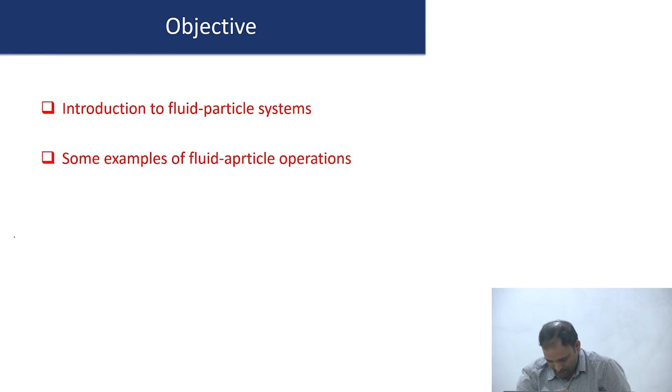Okay, just to begin with, particles are kind of everywhere, right? You look at any chemical industry or any industry in general, you will always have particles. Particles are dealt with in different forms, as listed here. You can either work with particles in the dry form. There's a lot of interest in looking at powders, processing of powders, how do you handle them, aspects of that sort. You also have cases where the particles are processed in a wet form, for example, paste, things like that.

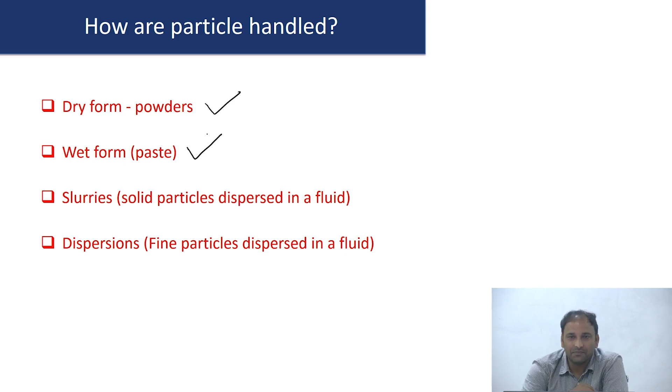And more often people work with the particles dispersed in a fluid. That's the last two things. You will come across something called slurries, which is basically a dispersion of solid particles in a fluid. Only thing is when the particle size is coarse, larger sized particles, maybe tens of microns or millimeter sized objects in a fluid, that's when you think about slurries. You also have something called dispersions, which typically refers to fine particles dispersed in the fluid.

More of buzzwords, if you want to call it, you can think about colloidal or nanoparticle dispersions. So what we're going to do in the rest of the 5 weeks is look at how people handle particles when you put them in a liquid. That's going to be the goal of the next few lectures.

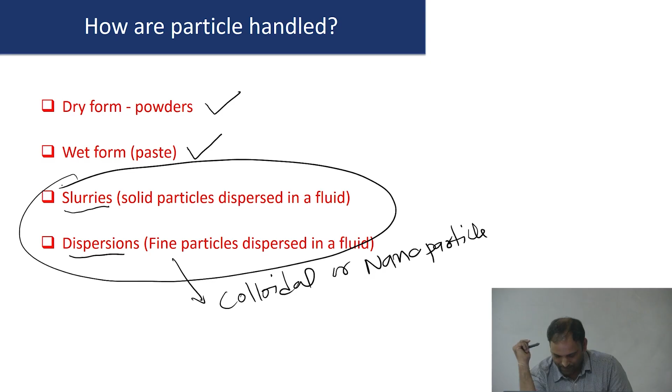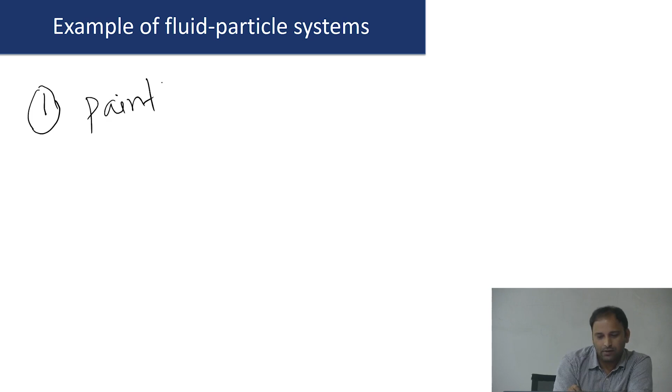Okay, any examples of fluid particle systems you know of? I just want to list different fluid particle systems that you know. Some names. I'm sure all of you know this. Let's write some examples, right? How about paint? Paint is typically some solid particles dispersed in a fluid. Of course, there will be other additives like pigments, but definitely there are some fillers, and these fillers are in the form of particles, and therefore paint is an example of a fluid particle system. Any other examples?

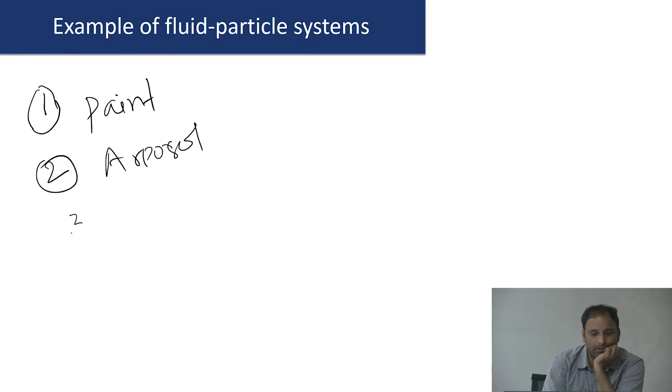What is that? Aerosol is a kind of fluid particle system, yes. How about milk? Milk essentially has a lot of water, plus there are some casein micelles, some proteins and stuff like that. That's an example of a fluid particle system. How about blood? You have RBCs, there is plasma, right? So I can think of a lot of examples where particles coexist along with the fluid.

What is common between paint, milk and blood? What is that? Okay, I don't know if you can really call blood a colloid, because the typical definition of colloids is that you should have a particle size ranging from 1 nanometer to about 1 micrometer. If the particles are in that range, they are called colloidal dispersions or nanoparticle dispersions. But blood's red blood cells are larger, about 8 microns, so it's really not a colloidal dispersion. But still, there's something common between paint, milk, and blood. What is that?

They're not emulsions. I mean, if you look at blood, it's not an emulsion. We'll come back to some of the classification a little later on. But what is common between the three is the dispersing medium: they're all particles in a fluid, right? And in this case, the fluid is a liquid. If you look at all these things, these are particulate dispersions in a liquid. That's a common thing between 1, 3, and 4, right?

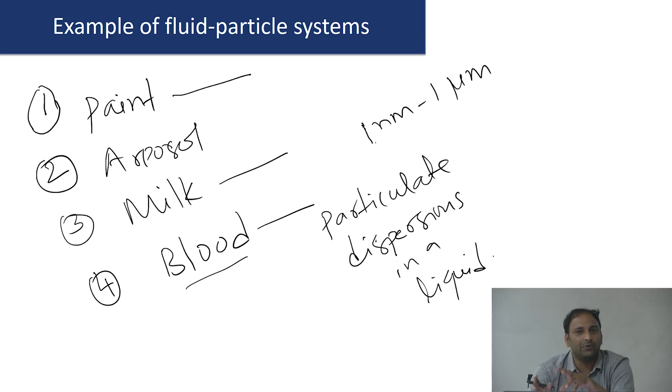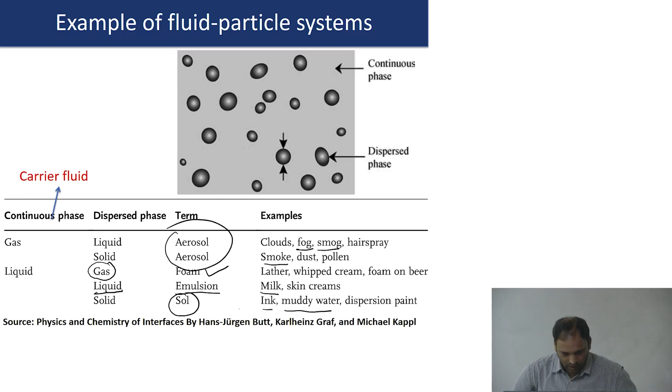Now that we know a little bit about fluid particle systems and different examples, I have a question to ask. Can you think of an example where the formation of particles occurs during a processing operation or unit operation? Any examples? I want an answer. So far, we looked at milk and paint and stuff like that. Of course, milk and blood are naturally occurring, so there are particles inherently in the fluid.

Paint is a formulation wherein you put particles into a fluid to get a paint of whatever desired quality. These are examples where the particles are either already there or dispersed externally. You take them from some source and put them into the fluid. I want an example: are there operations where the particles are formed during an operation? It could be any chemical process. Yeah.

Grinding. Okay, so he is using the term grinding. I hope all of you know grinding. You take a solid particle and reduce the size. There are different ways of reducing the size, but if you chop off particles and make smaller stuff, that's what is called grinding. That's an operation where you start with a larger particle and break it down into smaller particles. I want an example where I have a fluid, and the particles are formed during its processing.

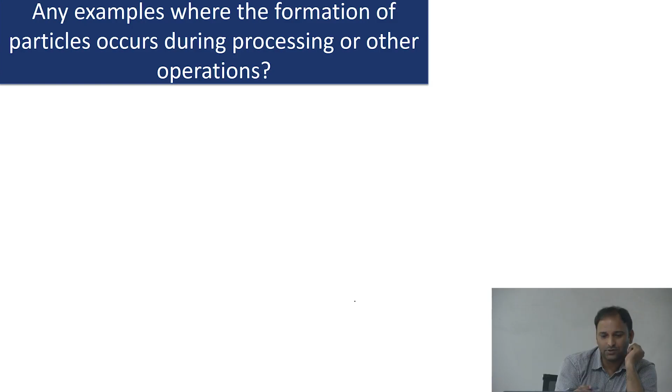Precipitation, right? Precipitation is one example. All of you have heard this word precipitation. This typically happens, in a loose term, when the fluid becomes insoluble for the particle. Say I have a solution, for example, water plus some particles, or some salt dissolved in a fluid, and I have a way of changing the solvent quality.

Let me take an example. Precipitation is one of the areas where there's a lot of research. I'm going to give an example where precipitation is used as a method for making particles.

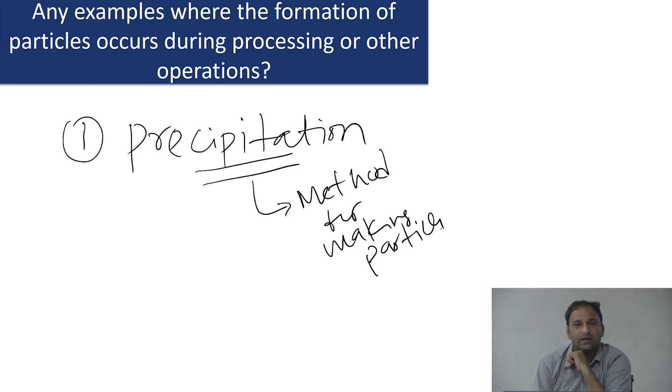Okay, there's a class of technique called nano precipitation. What is done is this: you take a container, and your container has water. And you take another solution where you have some solvent, and in the solvent you dissolve a polymer.

This solvent is a good solvent for the polymer. The polymer completely dissolves in the fluid, and it gives you a clear homogeneous polymer solution. Now, when I add this into water, if the solvent and water mix, they like each other, and if the polymer doesn't like to be in contact with water, as soon as I add this solution into water, the polymer separates out in the form of a particle.

This technique is what is called nano precipitation, again one of the widely used techniques for making drug particles and things like that. So one of the examples where particles can be formed during your operations could be nano precipitation. Any other example? Chemical reactions as well, right?

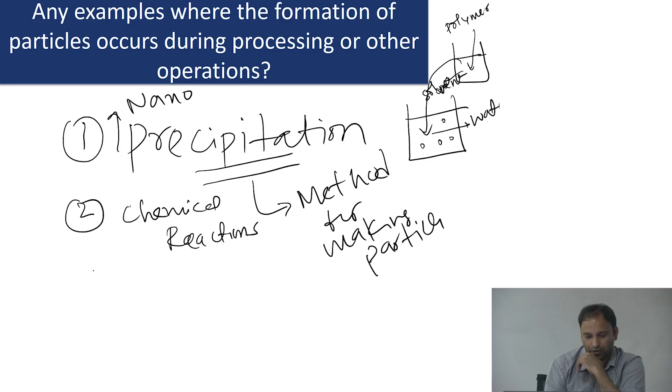So you can have chemical reactions. You can have a reactant A plus B giving rise to some product, and the formation of the product could happen during the reactions. Any other thing? Something that all of you know? Crystallization. Whenever there's a homogeneous fluid, if you create some sort of supersaturation, there's going to be nucleation of particles and stuff like that.

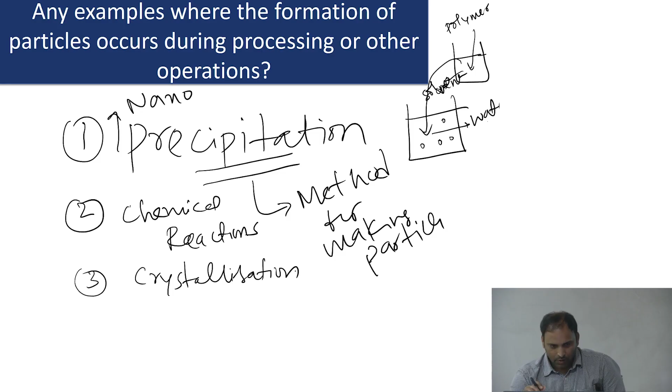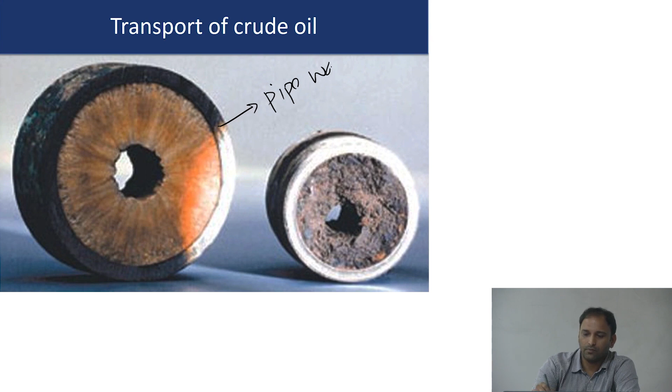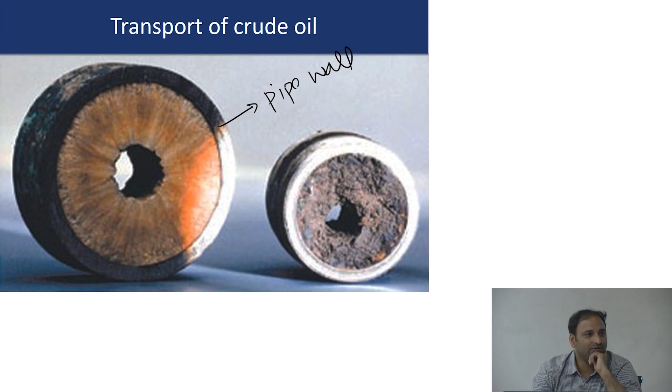So that's your pipe wall. This is your wall. What is in the center? Any guess? That's your wax deposition. All of you know that crude oil is a complex mixture. It has hydrocarbons, paraffins, aromatics, asphaltenes and things like that. There are organic compounds of different molecular weight present in the fluid.

When you're transporting these fluids, depending upon several conditions, the crude oil could be subject to different conditions. The temperature around the pipe could reduce during transport, depending on weather conditions, hot, cold and so on. Because you have long chain molecules of different molecular weight in the crude oil, when you cool such fluid there's going to be some sort of crystallization.

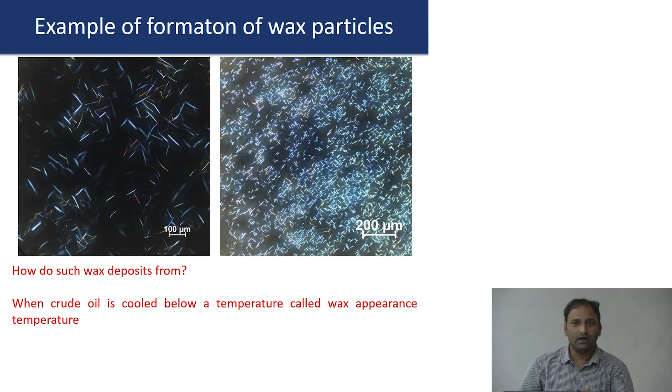What you are looking at are images obtained by taking an oil with some wax dissolved in it and heating the whole fluid to a high temperature, like 80 degrees centigrade. If we start cooling it down, at some point you see the formation of needle like structures. These are the wax crystals, formed when you cool the fluid down to something called the wax appearance temperature.

If you transport this crude oil under conditions where the temperature is always above the wax appearance temperature, it will continue to flow like a nice fluid with no issues. But the moment the temperature surrounding the pipeline goes below the wax appearance temperature, you start seeing the formation of these crystals, and they start depositing on the inner wall of the pipes. The skin of deposited wax grows in time, and ultimately it may even lead to a blockage.

This is an example where you start with pumping or transportation of a fluid, and particles are formed during transport because the temperature conditions are altered during the flow. Now what do you think would be the implications of the formation and deposition of particles in terms of fluid mechanics? Any thoughts?

Okay, so of course there are several implications, right? Now we know that whenever there is a generation of particles, the viscosity of the fluid goes up, right? We saw an example in one of the lectures that I gave, wherein you have a base fluid, you start adding particles, and we said that the viscosity was going up. Therefore the generation of particles can lead to a significant increase in the viscosity of the fluid. Therefore there are going to be associated transportation costs, so one has to worry about that.

As is evident from the figures, the deposition of the particles on the inner wall reduces the cross sectional area, right? Effectively the cross sectional area available for the fluid flow is going to reduce, therefore there is going to be a reduction in the flow rate as well. So it could have implications on the fluid processing that you're trying to do. Of course, too much wax deposition can lead to blockage. It can completely stop the fluid from transportation, right?

In the previous lecture, we talked about skin friction and form friction, right? And we said that skin friction basically comes from the roughness on the inner wall of the pipe through which the fluid is being transported. Now, when you have wax deposited, obviously it's going to affect the surface properties, and therefore it is also going to affect the skin friction. So the formation of particles is of relevance both in terms of understanding when the particles form, as well as looking at fluid mechanical aspects. Yeah, somebody has a question.

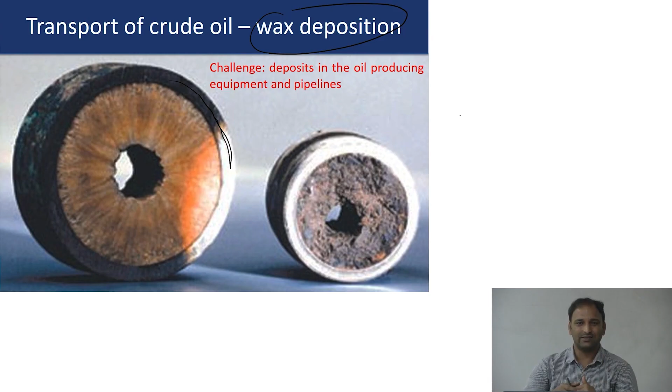There are two aspects. In the example that I gave you, in the initial stages of wax crystal formation, when these things start appearing, initially they are nicely dispersed in the fluid. In that context, I have a homogeneous fluid particle system. What you are seeing here in terms of deposition happens at a later stage. First there's going to be the formation of a first layer of wax crystals. It's not that this happens instantaneously; it happens over a period of time. But initially you could think of crude oil, at least when the temperature is around the wax appearance temperature, as a homogeneous dispersion of such particles in a fluid.

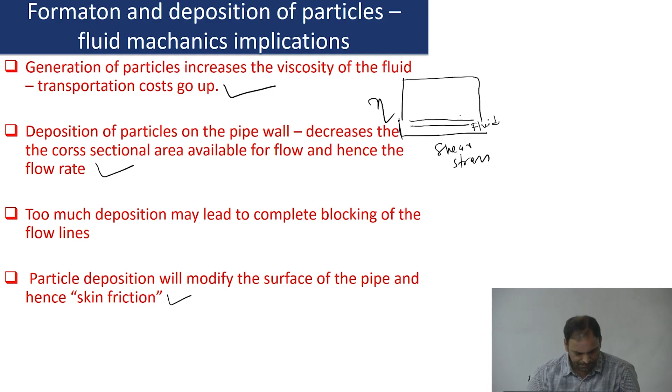Okay. So with this, I just want to set a base to say something about particles, that there are particle fluid systems, and there can be implications in terms of understanding their fluid mechanics. Now I want to move on to talk about the different fluid particle processes that we're going to see in the course. I just want to start by showing you a video. Let me just show that.

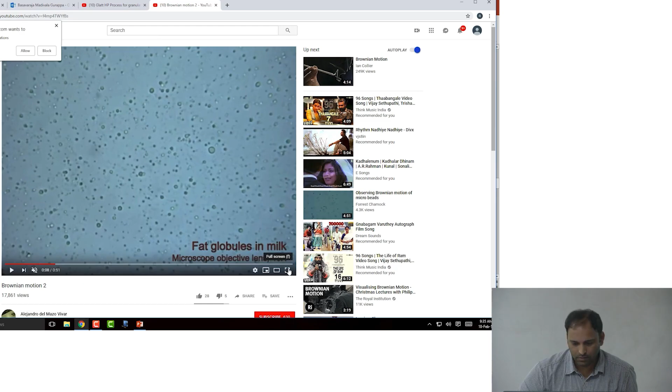So what you're seeing is a movie. We can do this in our lab if you're interested. They have a container filled with water to begin with, and all that is being done is to take one drop of milk and just drop it in the fluid. Nothing else is happening. Just one drop of milk into a container, kept below a microscope objective, and you're watching it. What do you see? Oops, I should go back.

You saw the title, right? What do you see? Brownian motion, right? This happens when the particles are tiny, when you have a very tiny particle. If I do the same thing, let's say I have a container and I put in millimeter-sized objects, larger stuff, in a liquid, this won't happen, right? That's because the particles are really large.

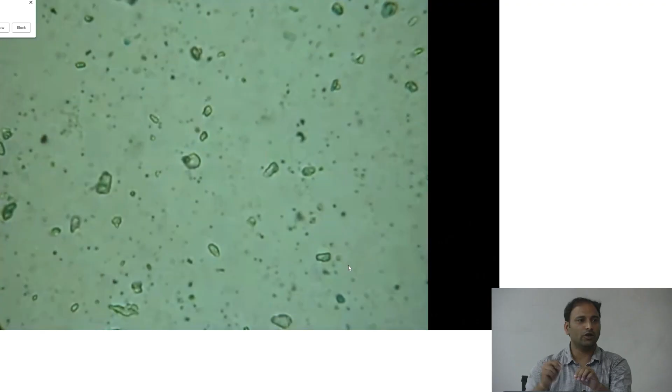Now the reason why this motion happens is because there are solvent molecules that are hitting the particles. Whatever thing you see jiggling around, that is because there are solvent molecules continuously hitting the particle, and the continuous bombardment of the particle by the solvent molecules is what leads to this motion.

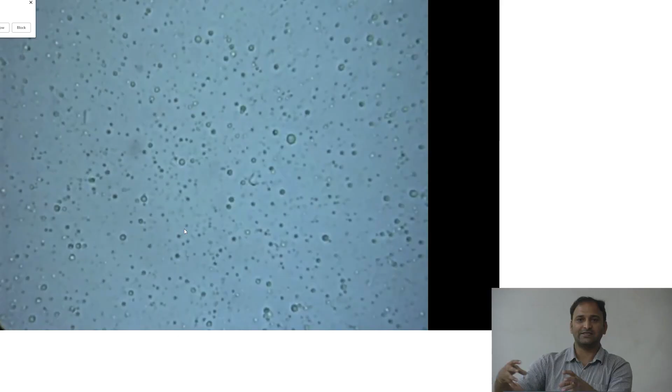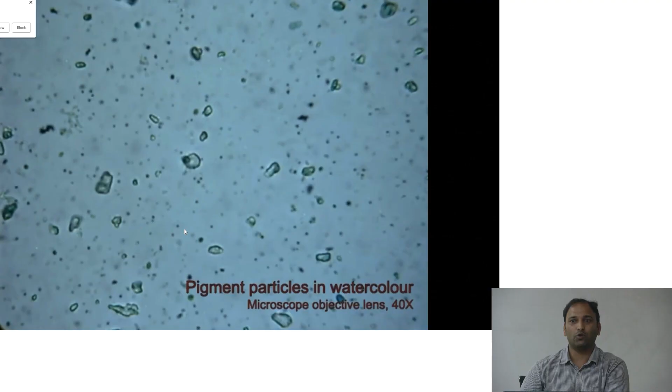And this motion happens when the particles are small enough. If I progressively increase the size of the particle, you will see that very tiny stuff can move a lot. Make it a little bigger, it moves a little less. If I make it bigger still, it won't move. That's because the energy with which the molecules are hitting the particles may become much smaller than what is required to move the particle when the particle size becomes larger. So let's put it that way at this point.

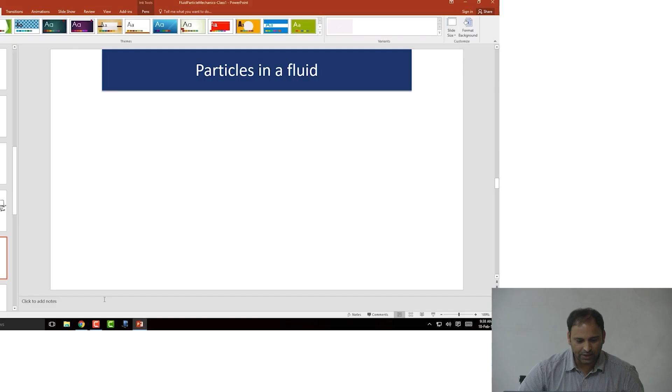In the context of the course, we're going to look at some examples where we have a fluid and we set the particle into motion. In this case, motion happens purely because of the bombardment of solvent molecules with the particle, but there are other ways of setting the particle in motion, right? Can you think of other ways? I have a fluid that contains particles and I would like to have them move. Any examples?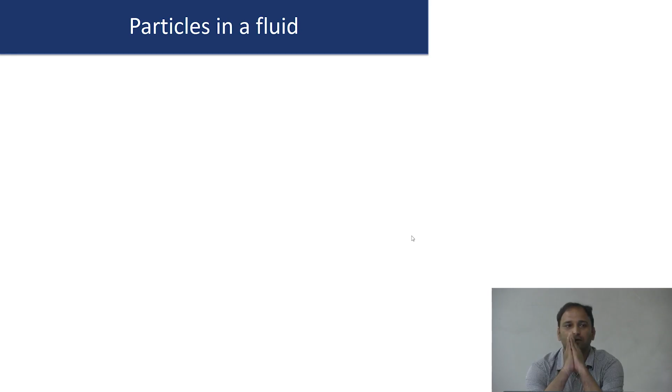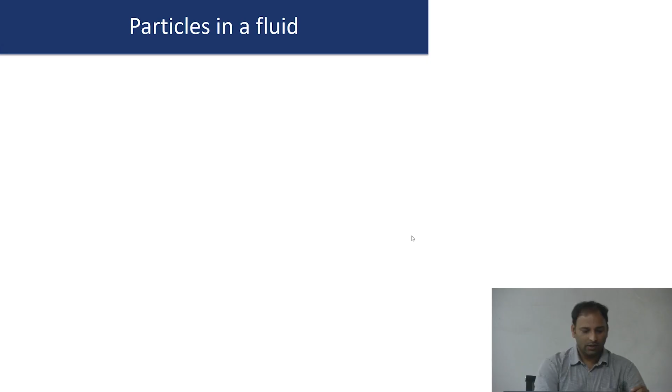Temperature increase, I don't know if that's the best way to answer this, because if you have, say, a tube that contains fluid and particles, if I heat one end and cool the other end, there's going to be a temperature gradient, right? Because of this temperature gradient, things can move. That is what is called thermophoresis. What we saw just now is an example of that.

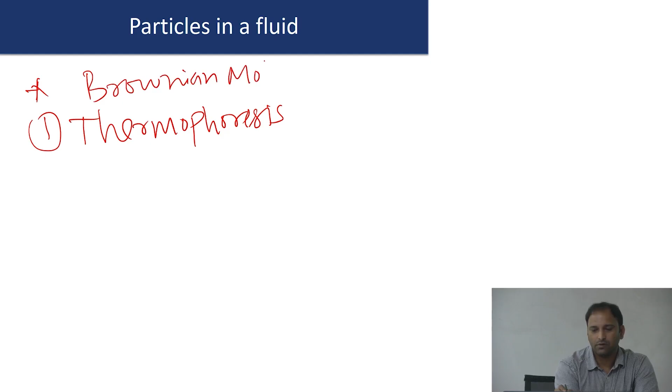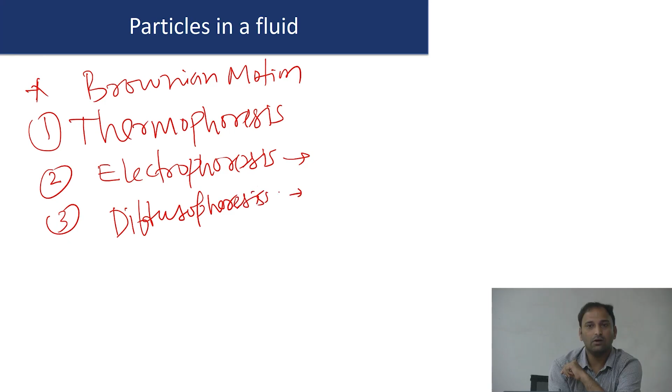Any other examples of how to make them move? Somebody says electrophoresis. As the name itself says, in this case you can set the particle into motion by applying an electric field, right? How about something called diffusophoresis, wherein the motion is set by creating a concentration gradient? So we are going to look at some aspects of this in the course.

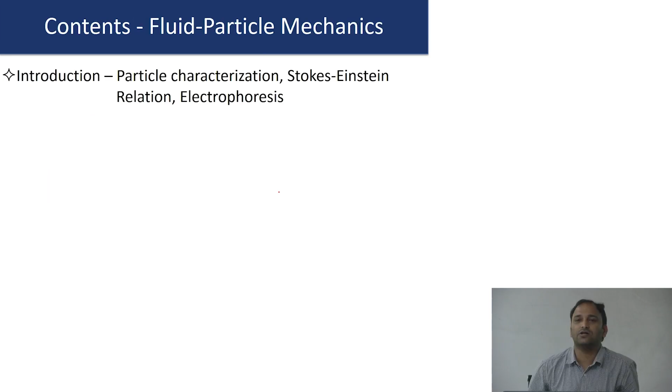I'm going to have one or two classes on particle characterization, because before you start looking at a fluid particle system, you should have an idea about what a particle is, where they come from, and what typical characterization one has to do before working with fluid particle systems. So I'm going to cover some aspects of that in the course.

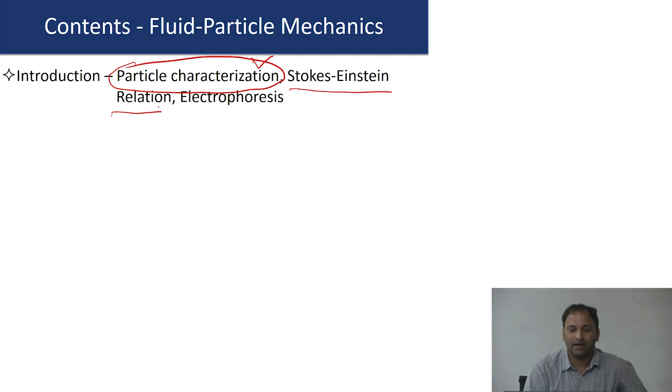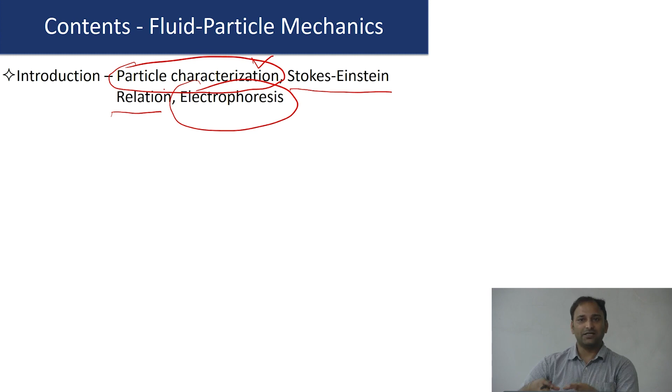We're going to talk a little bit about the Stokes-Einstein relationship, which comes from the Brownian motion aspects. We'll talk more about it in the course. Also some aspects of electrophoresis, just to give you an idea about motion of particles in a fluid. Those are going to be a few aspects.

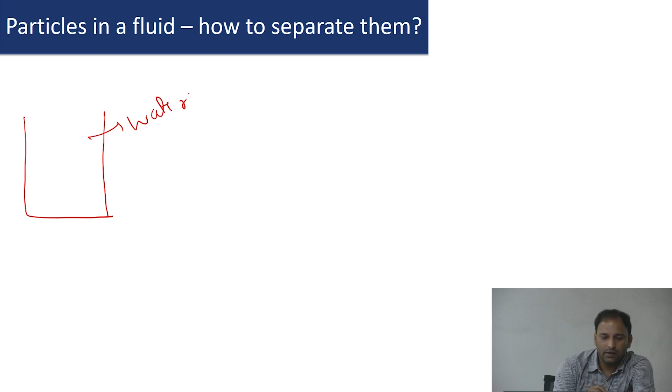Now, another aspect we're going to look at in the course is, if I have a fluid particle system, how do we separate particles? Any thoughts? Let's think about a case. I have a container with water, say muddy water, or rainwater if you want to call it that. There are a lot of particles in it. You can think about these as clay particles, because when you get rainwater, a lot of clay particles will be present in the water.

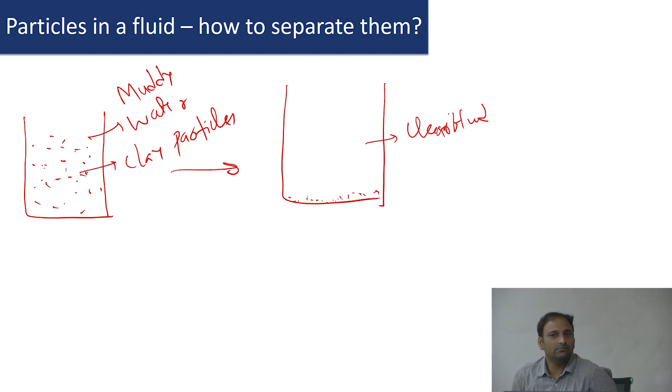So if I want to separate these things, what do you think would be the best way to do it? What I would like to do is take this and somehow ensure that everything is at the bottom and there's a clear fluid. So how do you do that? Any examples? Any thoughts?

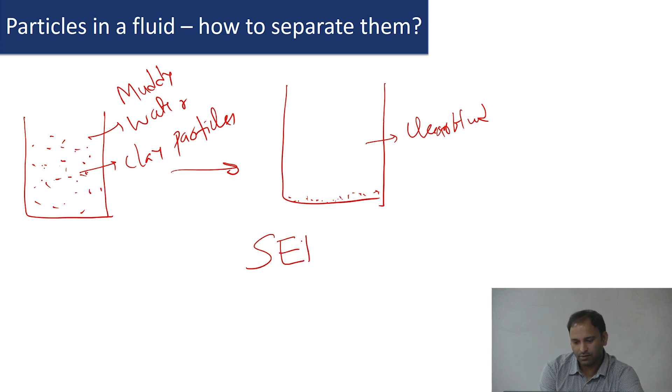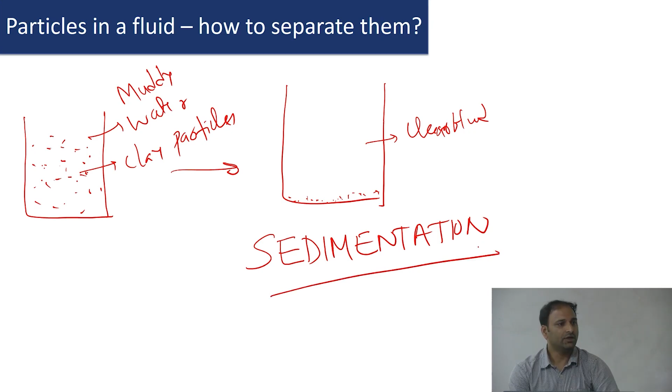Something called sedimentation. All you have to do is take this container which has these particles and just let it stand. Then gravity is going to kick in, and the particles are going to slowly sediment to the bottom.

So we're going to look at sedimentation of single particles, and we're also going to look at sedimentation of a collection of particles. In this example, I mentioned that they're going to settle down because of gravity, right? So are there other ways of inducing sedimentation?

Are there other ways by which I can separate out the particles? In this case, what you can do is... what is that? You can do coagulation as well. Yeah, somebody says coagulation. What he is trying to say is that I have a system like this. Whatever particles I have, I'm going to make them agglomerate or coagulate. What happens when they agglomerate or coagulate? The particles become larger, and when things become larger, they can settle. So you can do that.

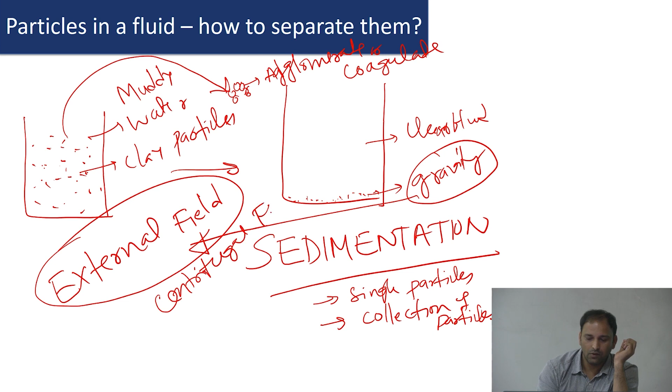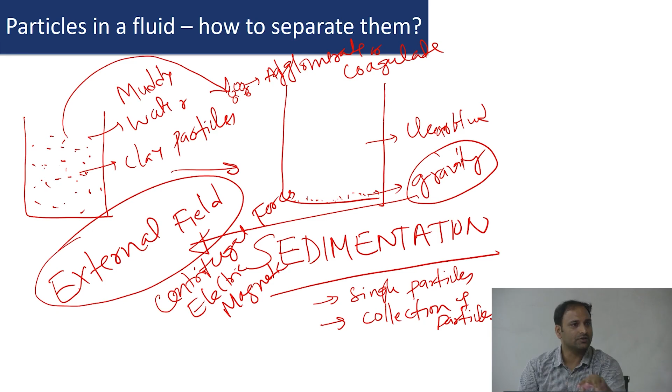And the point I wanted to make was that instead of gravity, I can use an external field. I can use centrifugal forces, or electric or magnetic forces. So there are ways by which I can either exploit gravity for separation of particles, or I can use some external fields. We're going to look at some aspects of that in the course.

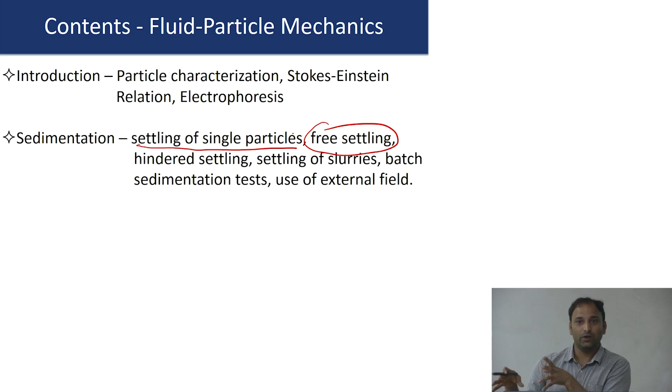We're going to start with settling of single particles. There's something called free settling that happens when the particle concentration is lower, or when you have very few particles in the dispersion. And hindered settling when you have a really large number of particles. We're going to look at some aspects of that.

Then we will move on to settling of slurries, where you have a dispersion of particles but the concentration is really large. People do something called a batch sedimentation test, where you take dispersions in a long column and watch them as the particles settle. Indeed, you have an experiment next semester where you'll do a batch sedimentation test to look at the sedimentation behavior of slurries. So we'll do some of that, and talk about using external fields.

So now, in processing, you often come across cases where I would like to have a fluid particle contact. What I mean is, say I have a particle, and I would like to pass a stream of liquid or gas over it. There are certain devices for doing this. Can you think of examples where I want something like this to happen?

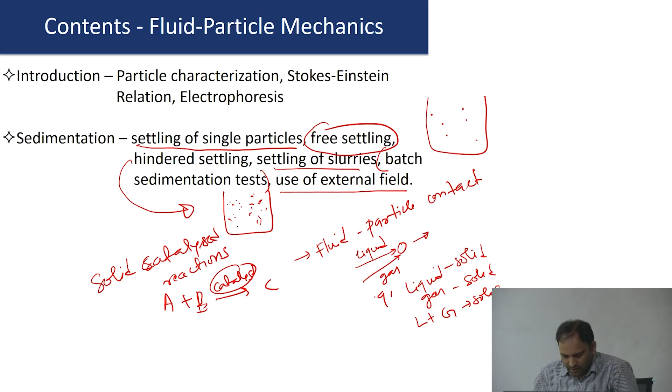So there are a lot of processes in chemical engineering where you have to ensure proper liquid solid contact or liquid gas solid contact. You can have a two-phase system, a liquid solid contact or a gas solid contact, or a liquid plus gas solid contact. And there are devices for doing that. One very commonly used device is a packed bed. It's a fairly simple setup.

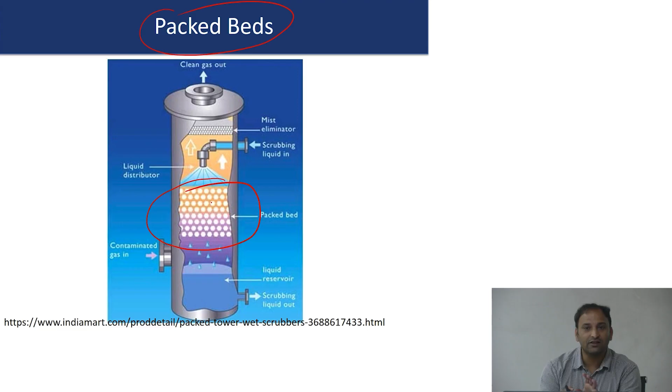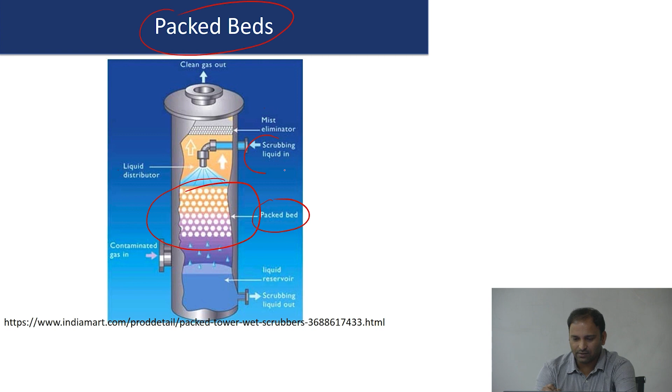What you have is basically a long column, and in the marked region you see these spherical things; these are particles put in the column. That's what is called a packed bed: solid particles packed into a bed. In this particular example, there is a scrubbing liquid coming in.

At the bottom there is an entry for a contaminated gas. This gas contains some liquid droplets. The objective is to have a clean gas go out at the top, and whatever liquid is entrained in the gas, I want to take it out. I introduce a liquid, and as it comes down the column it takes out all the liquid coming along with the gas, so that the clean gas can go out.

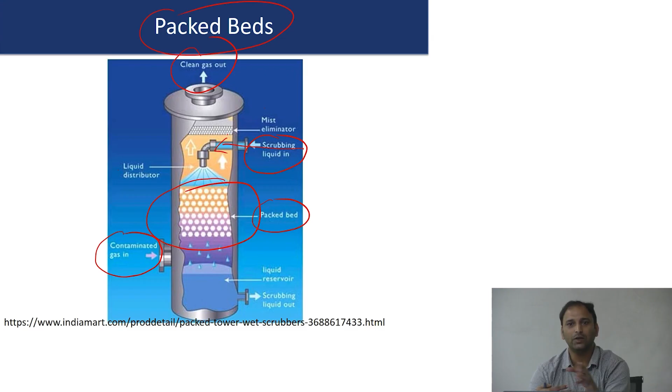So there are such devices. Of course, in this case it is used for some kind of a mass transfer operation, right. So you basically want to transfer the liquid that is there in the gas stream that is entering. I want to transfer that into a liquid stream that is basically coming down. So now if you were to do this without the packed bed, it is very hard, because

of course the gas will go up, and your liquid that's coming from the top would come down, but a proper contact between the liquid and the gas is not going to happen. Therefore when these fluids flow through the packed bed, and when I say packed bed, this is a bed of particles. Of course there's going to be gap between the particles, and when things flow between these gaps, there's going to be a proper liquid gas contact in this case.

So therefore there are cases where you want to ensure either a liquid gas contact, or a liquid particle or gas particle, all kinds of fluid particle operations where you want to ensure a proper contact between different species. People use this concept called packed beds. We're going to look at a little bit more of that in the lecture.

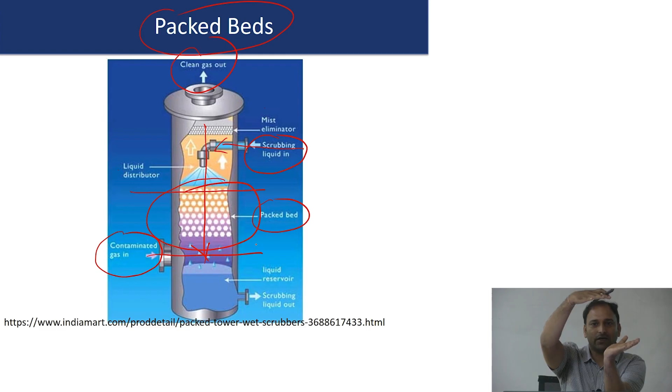So I just wanted to say that in the packed bed, what keeps the packed bed in that packed bed configuration is that there are basically support plates. There are two plates that are basically holding these particles, and no matter what kind of fluid velocities you use, the particles are going to be in a fixed state.

Now if you have a fluidized bed, if you remove the top plate, the top plate is not there anymore. If I go on increasing the velocity of the fluid that I'm sending from the bottom, at some point they're going to be in a nice dispersed state. That is what is called a fluidized bed. So we're going to look at some aspects of that.

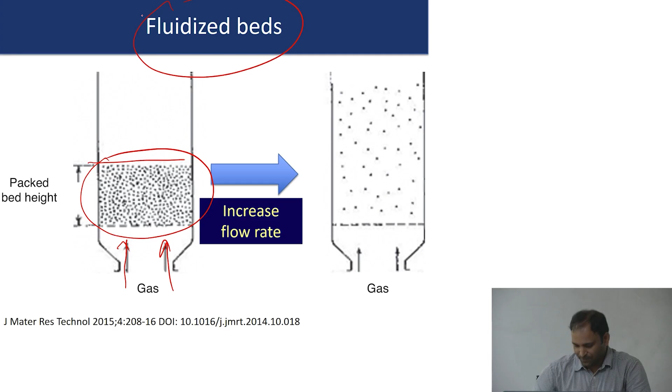So we're going to look at flow through packed beds and fluidized beds. We're going to analyze flow through packed beds in terms of, we've learned flow through pipes. We're going to use that concept to look at flow through packed beds, and then look at some pressure drop and things like that. So I have again a nice video.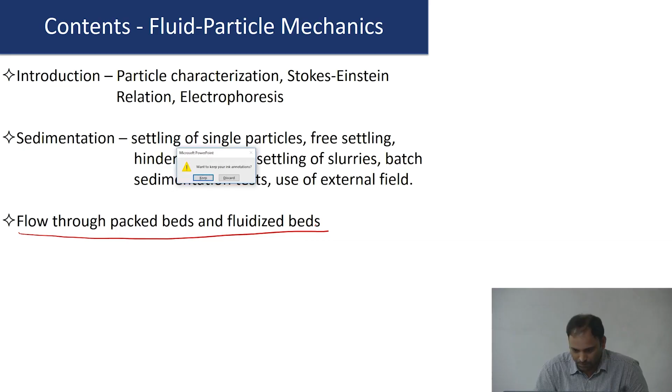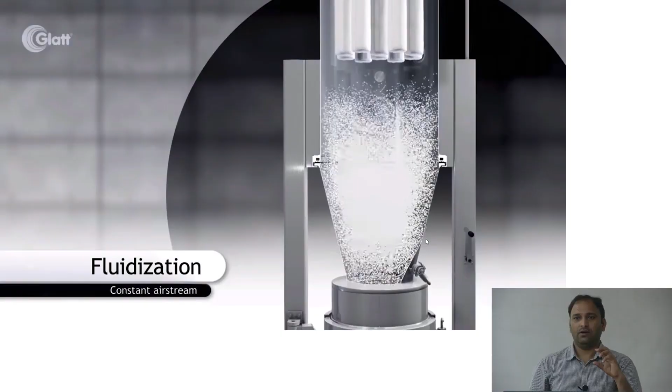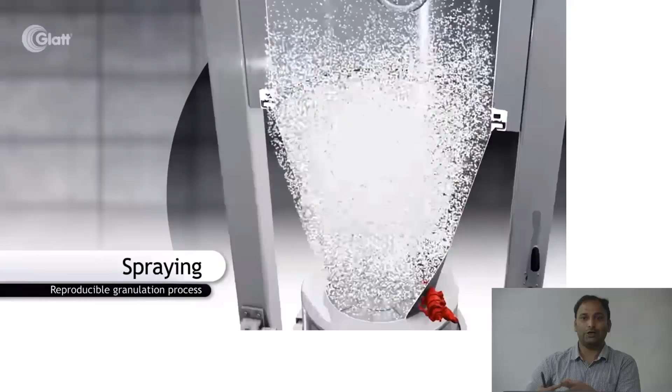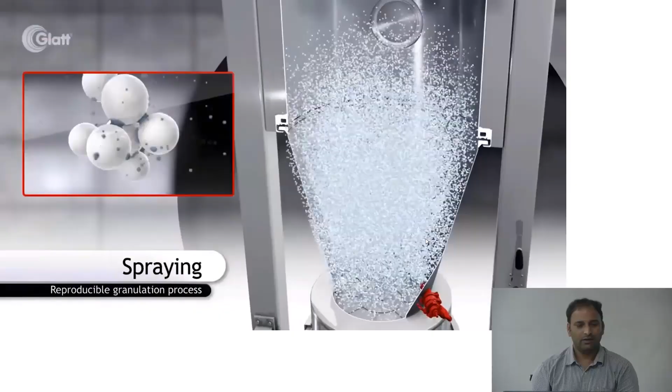In the pharmaceutical industry, there's a need for coating drug particles. And coating of drug particles can be done for several reasons. One of the reasons could be that I would like to control the release. People talk about controlled release. One way of controlling the release is that I have a particle and I do a coating on the surface. Or this is a case where there's some kind of agglomeration that somebody was talking about.

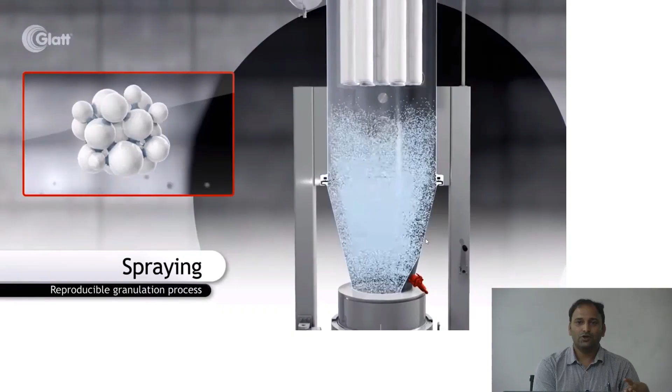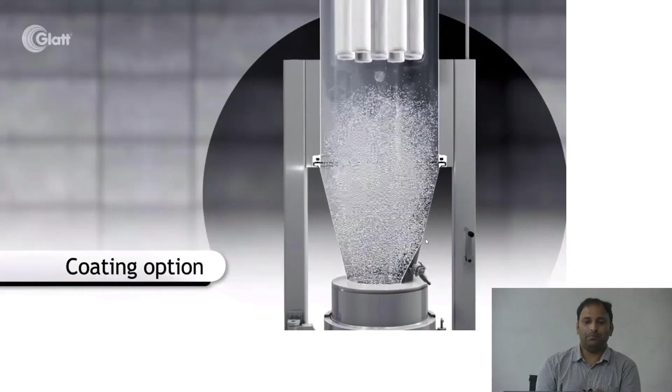It's a process called granulation. That means you start with smaller particles and then you induce some sort of aggregation between the particles. Fluidized beds are used for granulation purposes. What you do is you have a packed bed to start with, and then you introduce some gas, and then introduce some way of joining the particles.

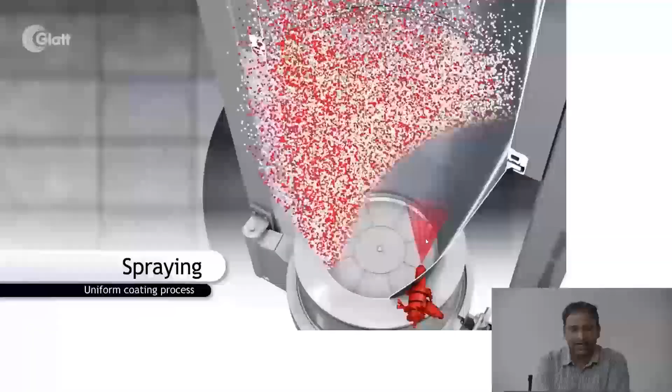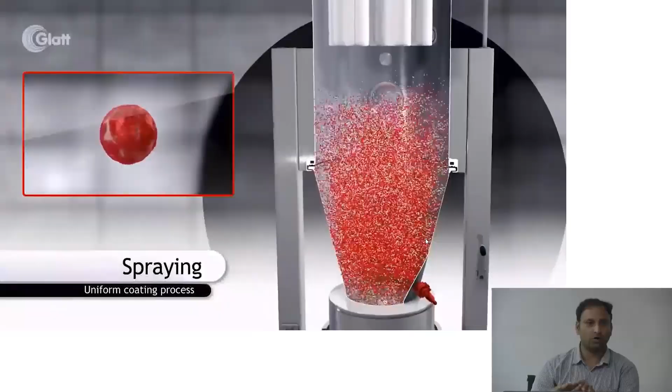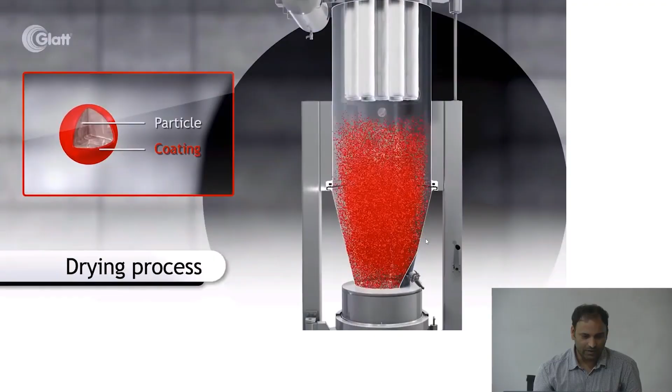This is another example where a fluidized bed is being used for coating applications. So you fluidize a bed to begin with, and then whatever coating material you want to put on the surface, you put it as another fluid, and then you can ensure a nice homogeneous uniform coating on the particle surface. So the idea would be to make this core shell kind of particle, where the core is maybe a drug particle, and the coating could be something that you're trying to use for controlling the release.

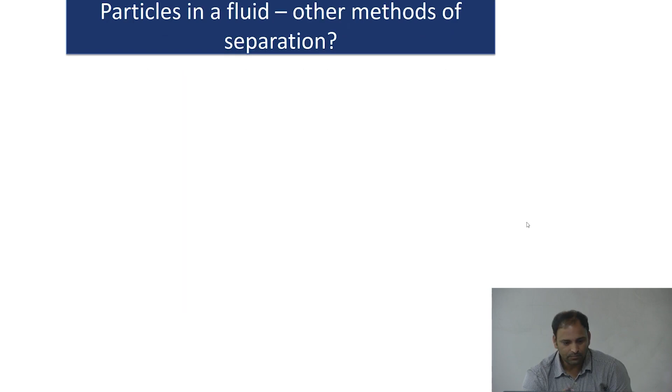I just want to end with the last piece. So we talked about separation by sedimentation and using external forces, right? Any other ways of separation you can think of? Have you heard of an operation called filtration? I'm sure all of you may have seen a water filter, right?

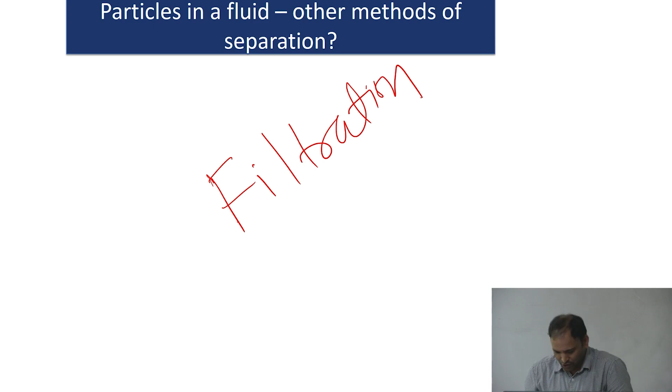If you look at a water purifier, there's a pre-filter that takes water from the tap, and it removes some particles to begin with. It goes into a purifier. There are going to be some carbon filters and things like that. So we are also going to look at some aspects of filtration during the course.

Look at types of filtration. There are some specific types of filtration, like constant rate filtration and constant pressure filtration, and filtration devices. We're going to look at analyzing filtration in the context of flow through packed beds. So these are some of the things that we're going to do in the class.